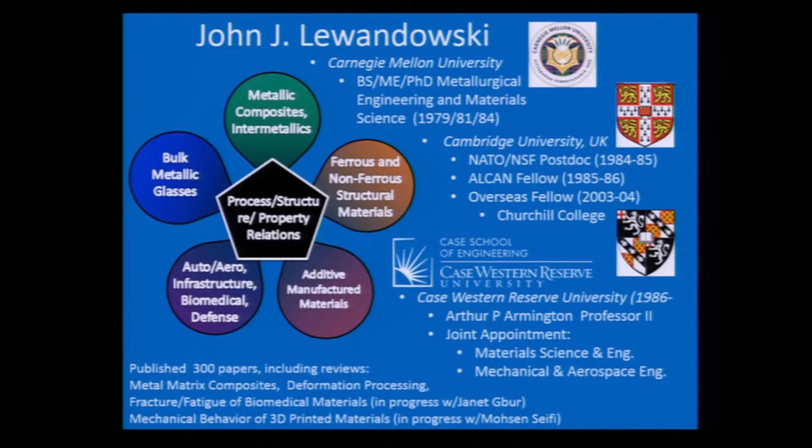As part of that, our students publish lots of papers, and in particular I want to highlight a couple of review papers being published on fracture and fatigue of biomedical materials that Janet Gbur is putting together. Then you'll hear a bit later about Mohsen Seifi, who's doing mechanical behavior of 3D printed materials, using these kind of standards to start to look at the kind of properties you can get.

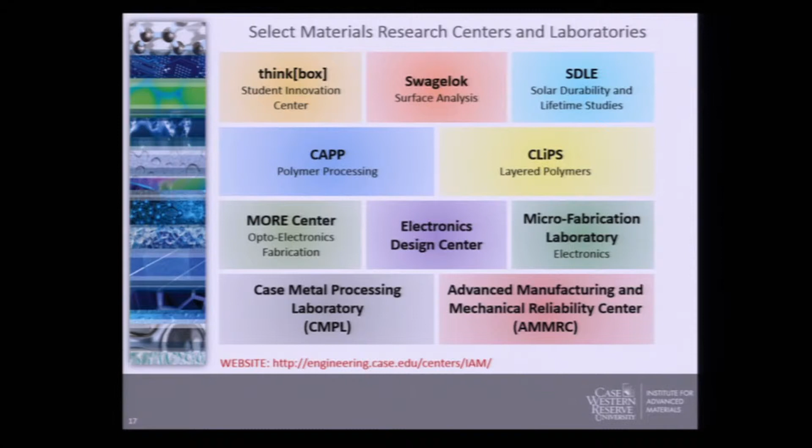The other thing I want to introduce to you is that we have lots of laboratories at the university, top class equipment, millions of dollars worth in many cases, run by staff that'll help train you on them. So you should take advantage of these. There are a number of these listed here, and certainly more, but they all use standards to some extent.

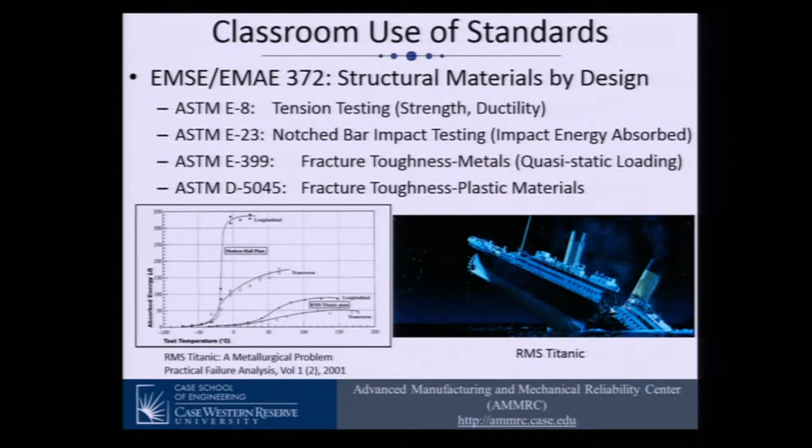We use those kinds of things in the laboratory to demonstrate how materials change with time, but also how they change with temperature, and certain ones will do this very dramatically. We also do things in tension and other quasi-static loading conditions, but the impact ones are really kind of exciting, so I like those, and that's why I showed it.

We also do failure analysis, at the graduate level, which was brought up earlier. This is a class we teach and have been teaching for quite a while, and we introduce the engineering concepts used in this. In these cases we also use standards to look at the chemical analysis of some of the materials or their material properties, as I just described, and we invite people in from the Case Law School faculty to explain this to students also from that side and perspective.

Now, if I look at the research use of these kind of standards at the graduate level, I'll highlight some of Janet's work again, where she's putting together this fracture and fatigue study of wires and cables used in the biomedical industry. This is a large review, hundreds of papers, gathering information where tests have been done using various ASTM and other standards.

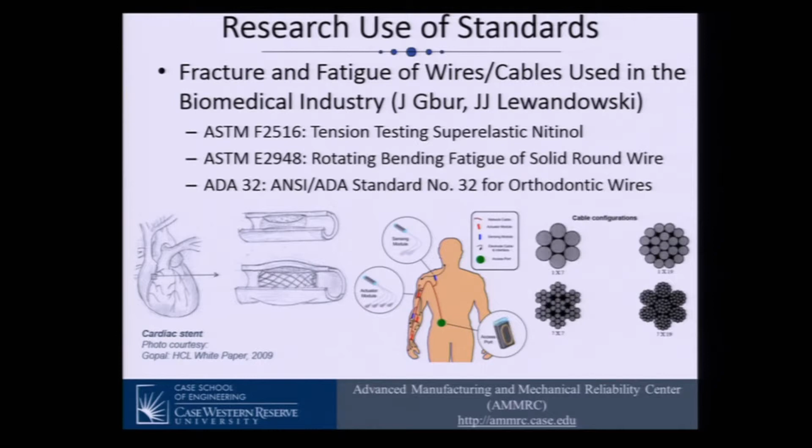Wires and cables are used in lots of different biomedical applications, and the way those wires and cables can be configured is quite different, as you can see on the right. They can be used in heart pacemakers, in electrode stimulation - things pioneered here at CASE on functional electrical stimulation - and they can also be used in stent applications. So the reliability of the material is very important, and how you characterize it in a systematic way.

In addition to this, there's lots of work going on now in additive manufacturing, 3D printing. The idea here is, rather than machining a sample, you print the sample or print the component, as long as you have the CAD model to do it with. There are a number of evolving ASTM standards coming to the forefront, one of which you'll hear from Mohsen Seifi shortly.

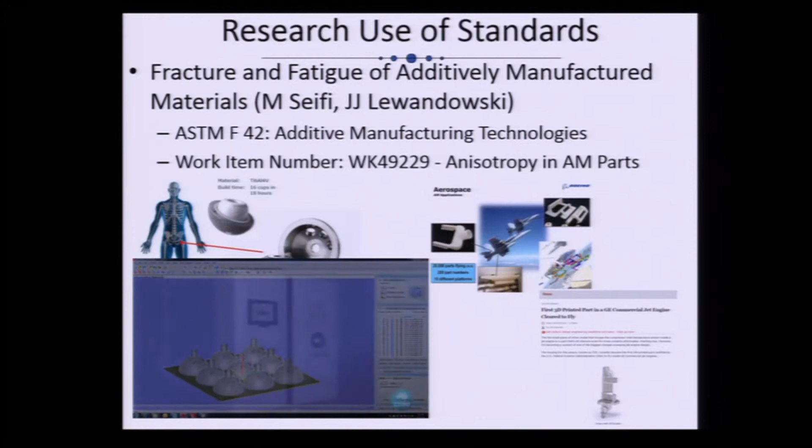The inset here is showing a biomedical component. The idea is, as long as you have the CAD model, you could build this layer by layer by selectively melting powders in certain regions and then building up that structure. This will continue, as you'll see in a second.

This is being done on biomedical components, and what's being done here is the powders are being melted layer by exposure to an electron beam. This is a cartoon representation of each of those powders melting, but you're essentially doing this layer by layer and then building the structure, as you'll see in a few seconds.

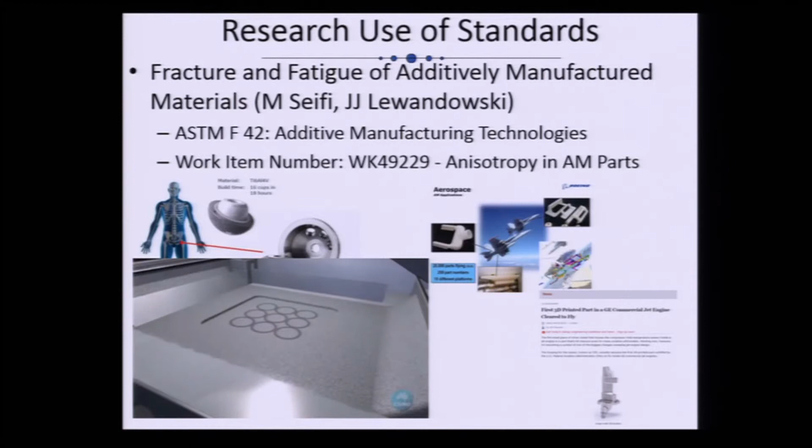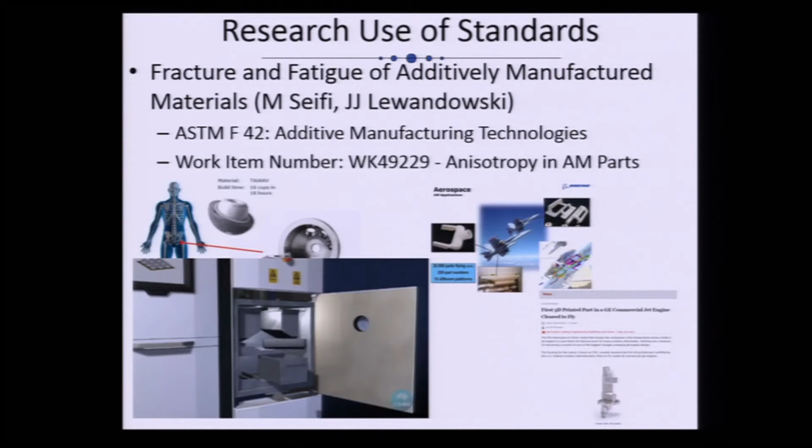Other industries are also using this now. Aerospace is starting to fly components. These are not fracture critical components at this point, but they are getting experience with them, both on the polymer side, and as recently announced by GE, a jet nozzle for fuel injection has been designed that could only be made this way. The question in all these cases is, once I have those components, what are their properties? Are there standards that are evolving that we can use to evaluate them?

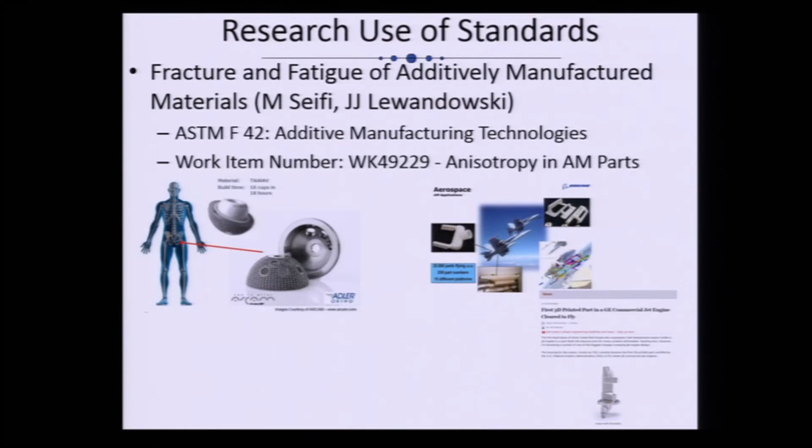The answer to that is yes, and you'll hear more about that from Mohsen in a few minutes. In this case, you can see that the samples that have been made are embedded in a powder, and then those finally come out. The key thing here is that they can be made with a porous surface that the bone can grow into. This is some work we're doing with the America Makes projects.

Same idea, where you use an electron beam, and we're going to make a sample now, an ASTM type bend bar that we can test in a controlled way. So now, rather than making a component, we're going to make a test sample, and in this case, layer by layer, the sample is built, and then eventually we're going to test it.

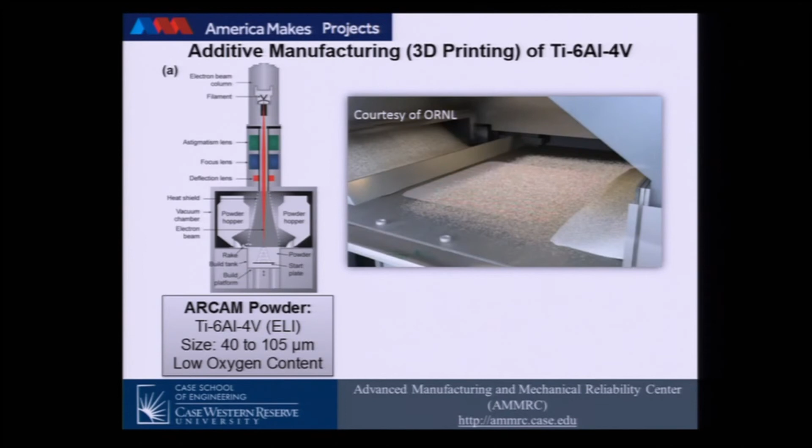We brought some of these with us that you can see afterwards if there's any interest. The idea in this case is, if I build one of these things, are the properties going to be different if I build it in different orientations? That's what Mohsen is investigating here - we're testing it in different orientations to see if the properties are different. Lots of interest in this area right now.

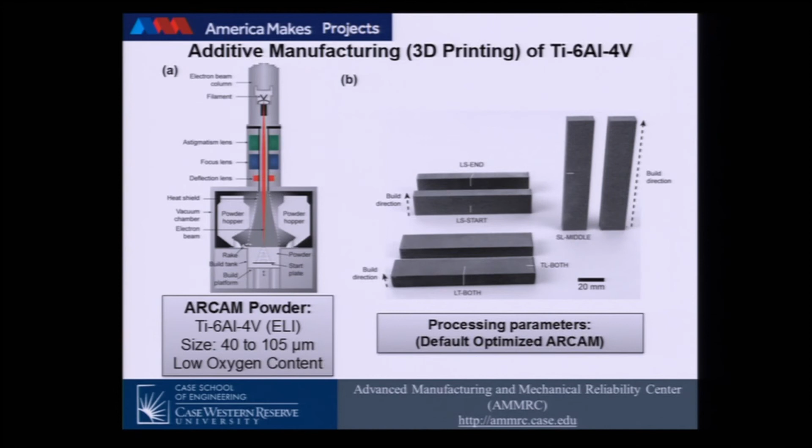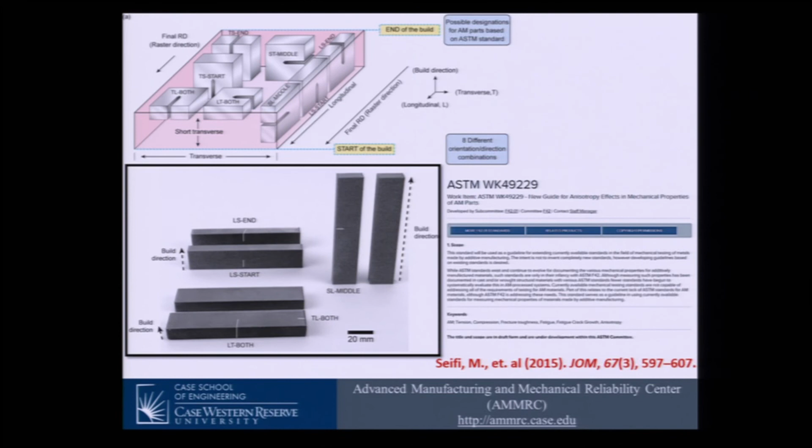I'll leave you with this: in conventional materials, we know how to characterize them because we can test them in all these different orientations. In these new evolving areas, like additive manufacturing, this is still evolving, and the properties have to be evaluated in these different orientations. Having something you can point toward, a standard that will help you do this in a systematic way, is very important. That's the thing I'll leave you with. Mohsen will pick up a little bit more on this later.